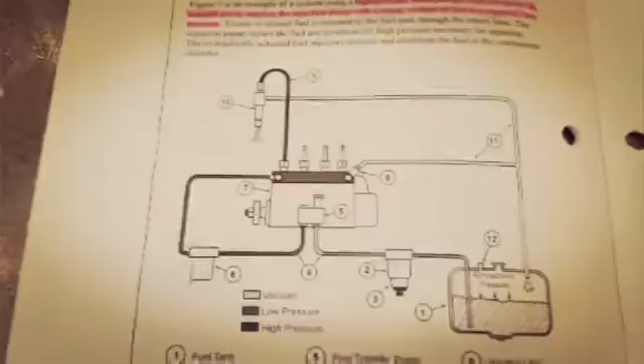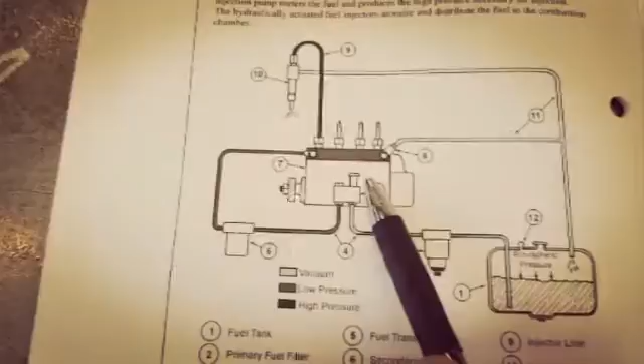We're going to be talking about the port and helix injection pump and how the fuel system works. The fuel system consists of an external fuel tank, right about here, and a supply transfer pump, a primary filter, secondary filter, injection pump,

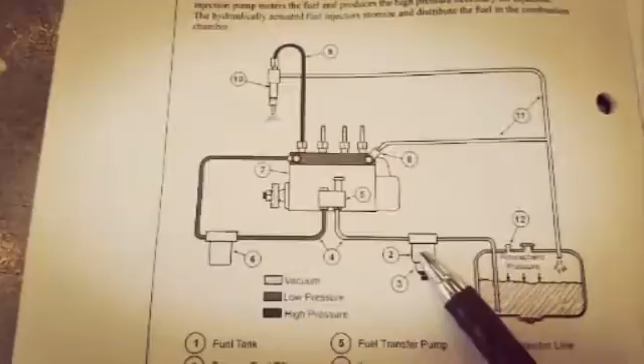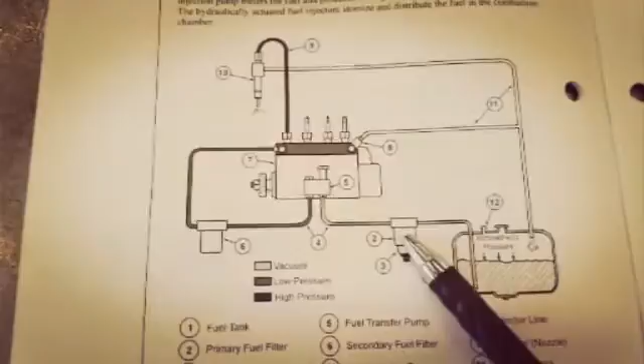injectors, injector tubing, and return lines. Fuel is drawn from the tank here through a primary filter, which blocks out particles larger than 25 microns. The transfer pump, which can be either a diaphragm or a plunger style, they are both self-regulating and can be run off the injection pump camshaft. The diaphragm produces about 10 psi and the plunger style has 25 to 30 psi.

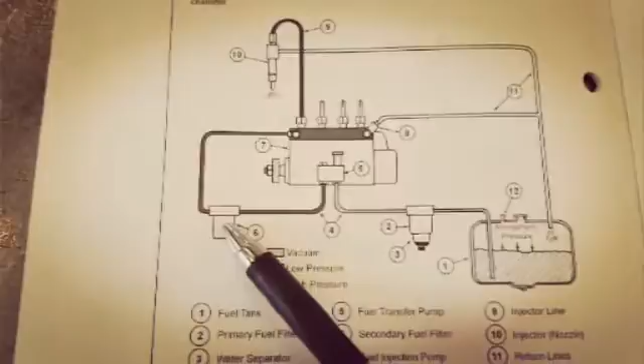The transfer pump here turns vacuum to low pressure and then pushes the fuel through the secondary filter, which blocks particles up to 5 microns, and then goes up to the injection pump, which is machined to 1 to 3 microns.

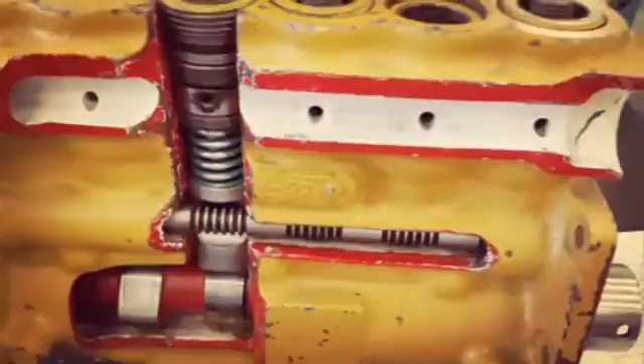The fuel enters the pump through a fuel gallery, which is here, and fills the barrel through the spill and inlet ports.

As you crank the engine, the spring in the governor, which is over here, holds spring tension in the governor that holds the pump to a full fuel. The pump is turned half the crankshaft speed.

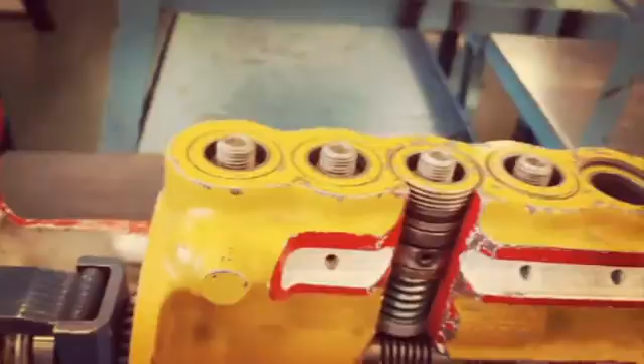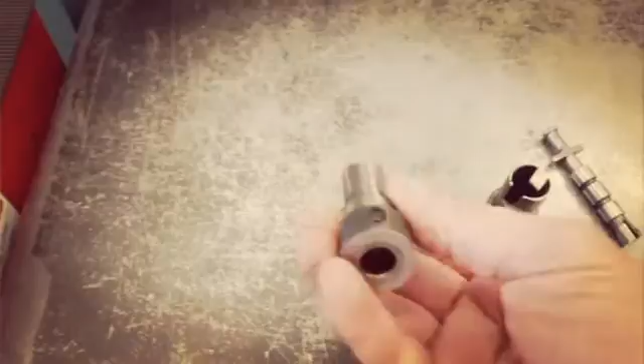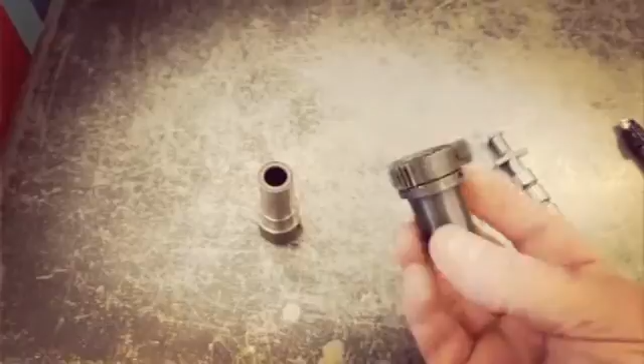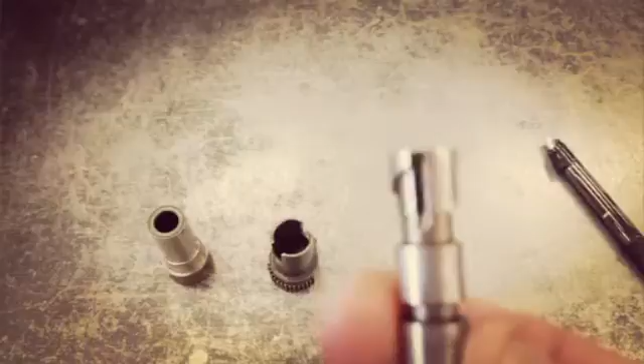The pump has two main components: the barrel and the plunger. This here is the barrel, which has the inlet port and a spill port. This is a control sleeve, which is in there too, which has gears. And this is the plunger, which has a helix cut into it with a vertical groove and an angular groove.

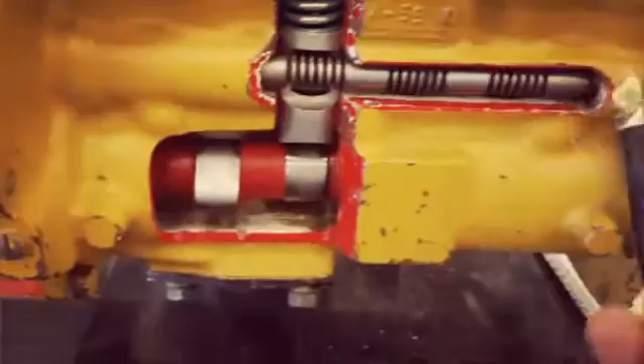It also consists of having a rack, which is here, delivery valve, which are here, and this here is your mechanical governor.

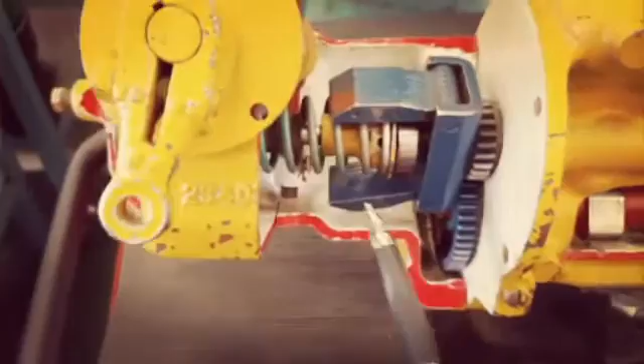The plunger has a helix cut machined into it, which also forms a vertical groove and an angular groove at the base of the helix. So if you look, right there is the helix cut in the plunger, and there's the vertical groove right there.

The barrel is located in the pump, which this is the barrel right there in the middle, which has intake ports and spill ports drilled so that they're above the plunger. The plunger is keyed right here

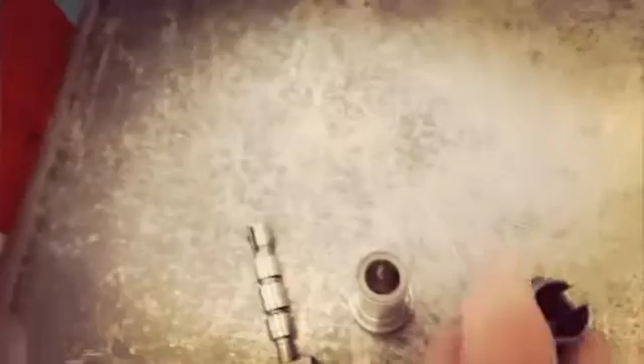to the control sleeve, which is right there as it goes in there, which has a gear wheel machined right here into it. The control sleeve meshes with the rack, which turns the plunger. Here's the rack here where it's machined onto there.

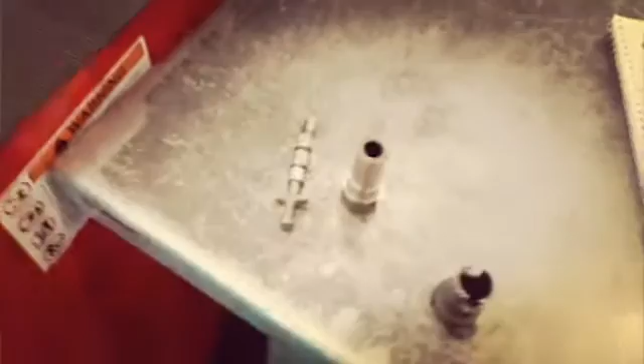The plunger has a constant stroke because it rides on the cam lobe lift right here. It is constant. And a variable end because of the helix cut in the plunger.

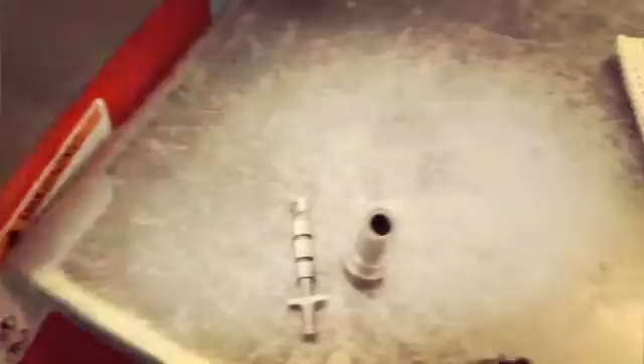This back and forth is controlled by the governor. The governor has two flyweights fixed to the gear. So these are your flyweights here and here. They're fixed with a gear that rotates with the pump's camshaft, which is down here,

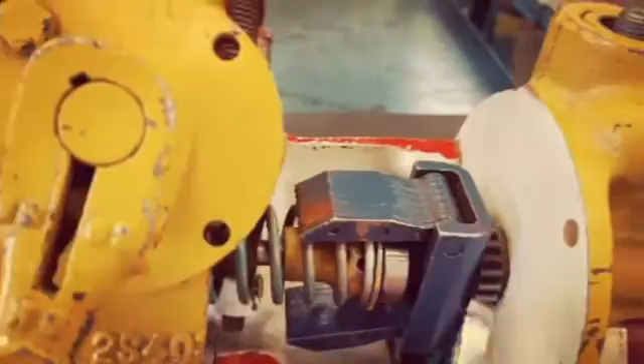to a spring, which is here in a sleeve. The spring tension here holds the fly weights towards the shaft, which is full throttle. As the camshaft rotates, the flyweights rotate, causing centrifugal force, causing the flyweights to move right here.

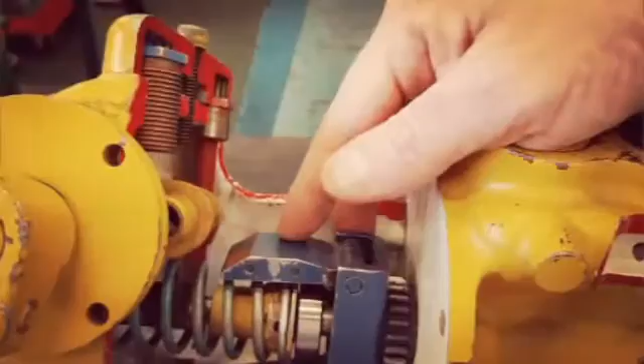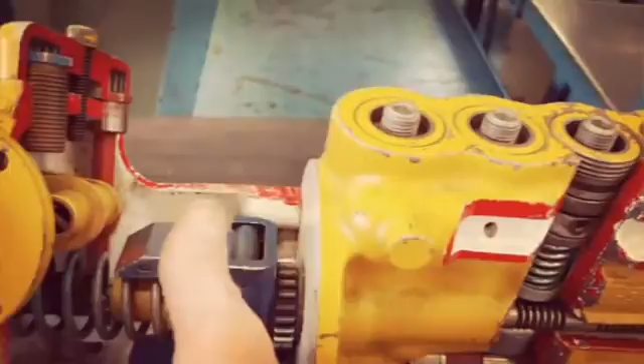Should the engine speed drop due to increase of load, the centrifugal force acting on the flyweights will decrease, allowing the spring here to push the sleeve along the shaft, and this will move to increase full fuel.

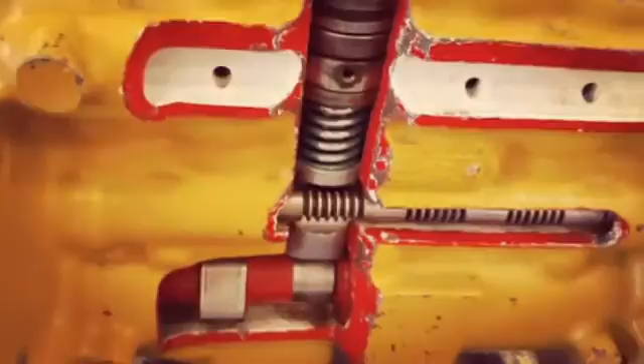This will move the rack, which will turn the control sleeve here and plunger to increase the fuel for the engine. On the other hand, should the engine speed increase, the centrifugal force pushes the flyweights outwards, so like so, out, which you can see the rack moving, flyweights outwards, which moves the rack, control sleeve, and plunger in the opposite direction, and fuel is decreased.

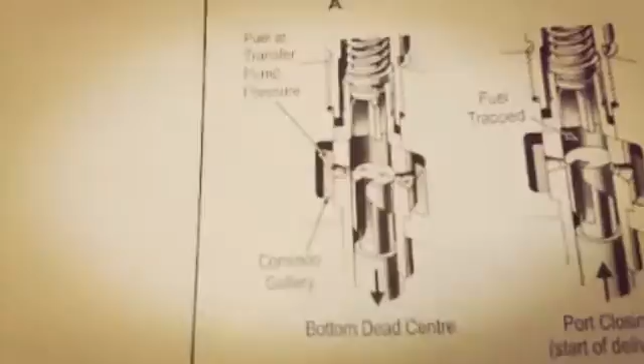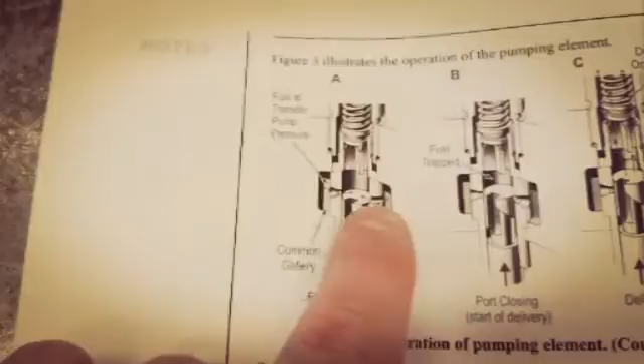So as the plunger moves down the cam lobe, this will fill. This is your fill or charging cycle. As fuel comes in, your spill ports here and here. So this chamber here above the plunger is filled with fuel.

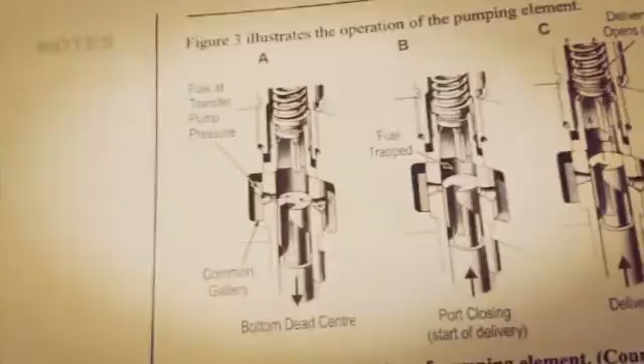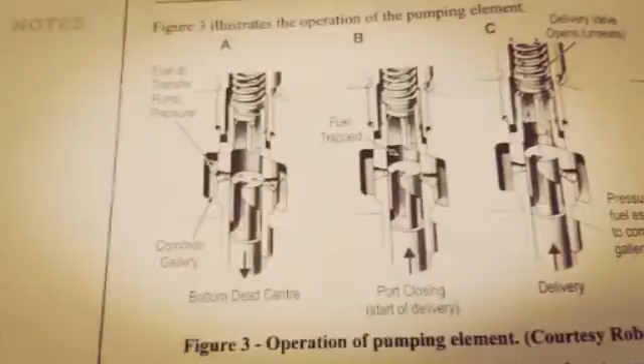From here, the plunger continues up past the spill ports. This is called port closing. The plunger continues to build pressure, which lifts the delivery valve off its seat, overcoming spring tension in the valve. This is the delivery stage.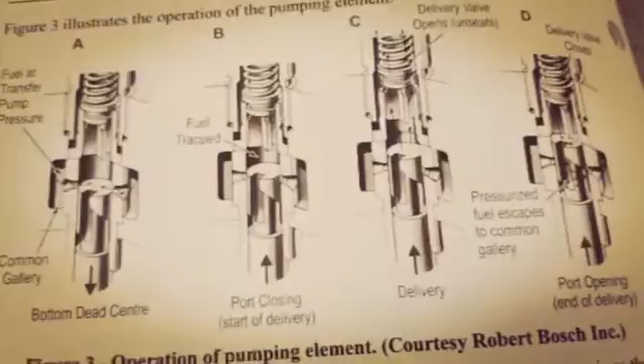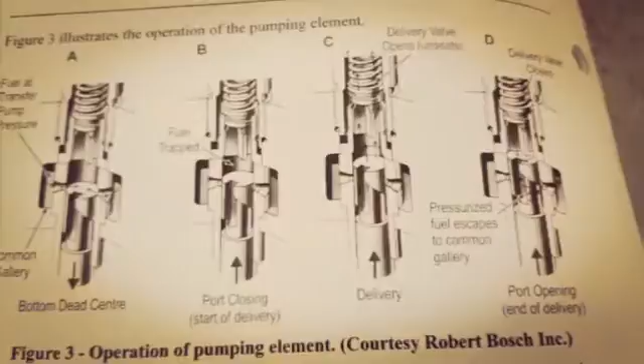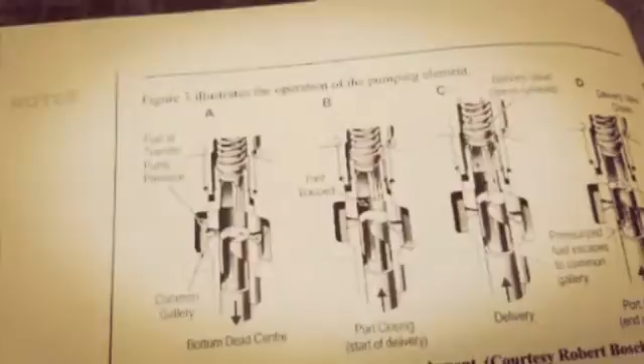As the plunger moves until the helix cut of the plunger uncovers the spill ports, pressure is lost, the delivery valve returns to its seat, and the plunger continues the rest of the stroke, and the remaining fuel returns to the gallery by an annular groove.

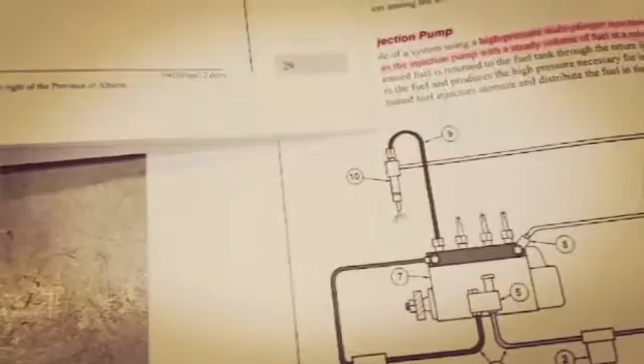After the fuel passes the delivery valve, the fuel is moved to the injectors by heavy-walled, right here, heavy-walled seamless steel tubing.

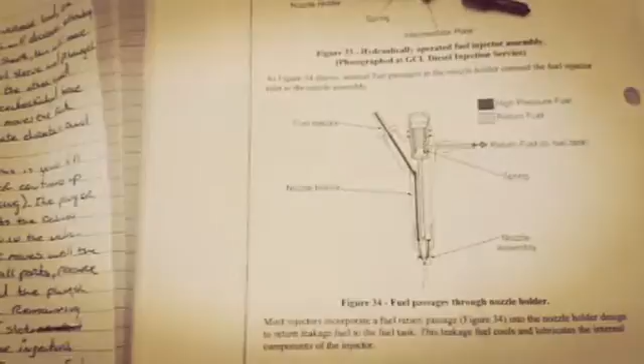High-pressure fuel lifts the needle off the nozzle assembly by a tapered surface on the bottom of the needle, overcoming spring tension around 2500 to 4000 psi. The fuel then is sprayed into the combustion chamber.

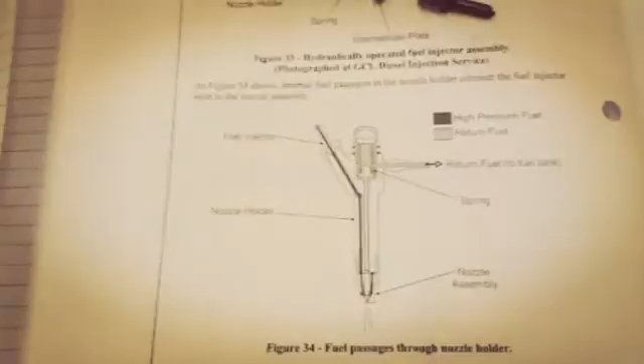The injectors are remote and hydraulically activated. When pressure goes down, the spring tension closes the needle, and the remaining fuel is then returned to the tank. The fuel injection pump over here, this is the return to the tank from the fuel injectors.

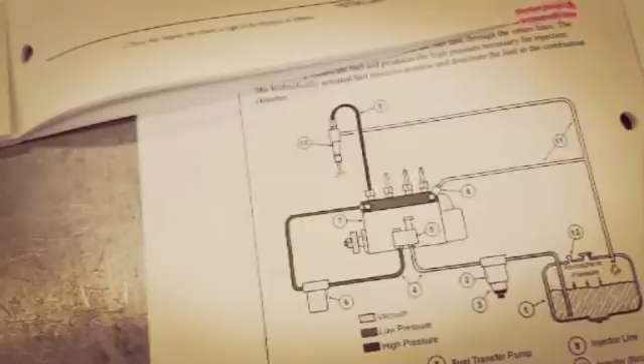Over here we have what is called the overflow valve, and the fuel injection pump also has an overflow valve that controls the pressure in the fuel supply circuit and allows excess fuel to return to the tank.